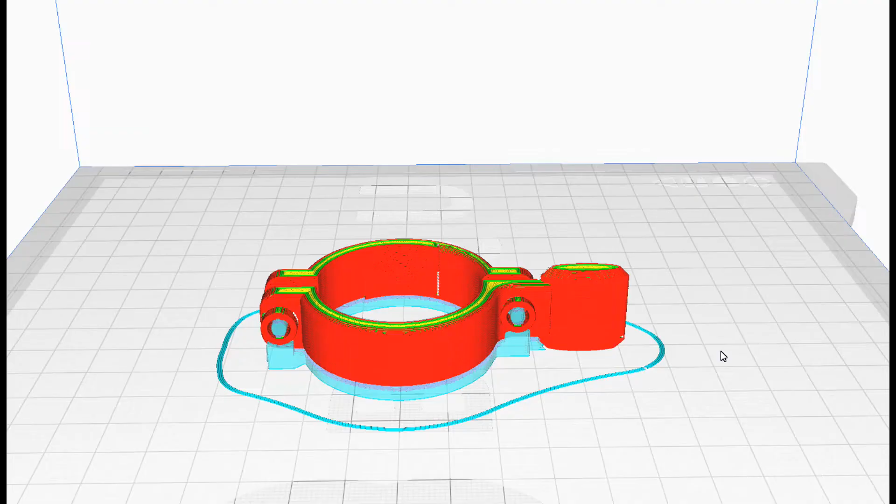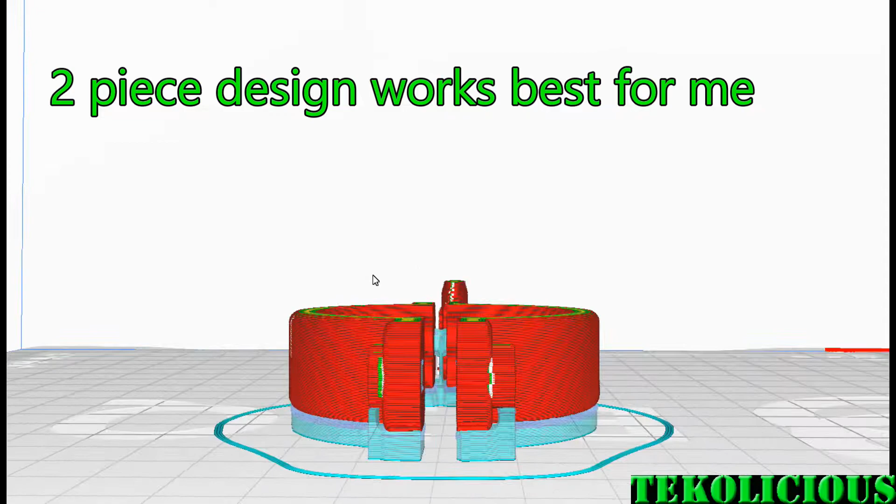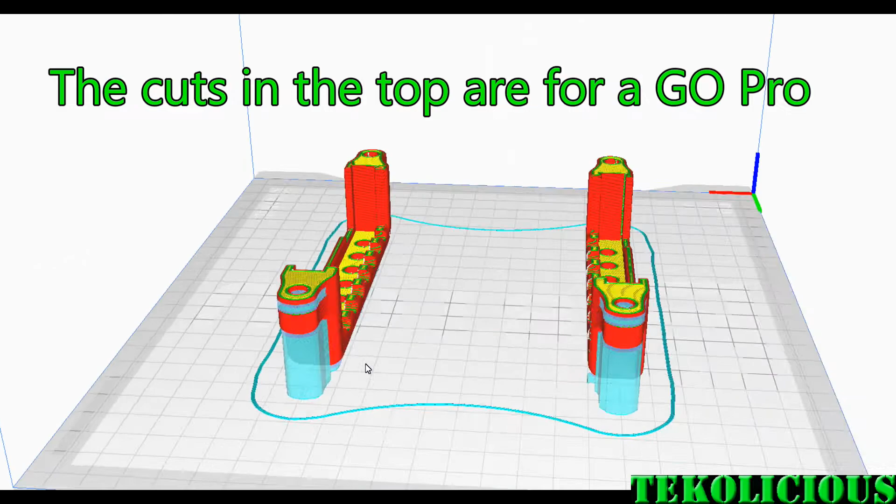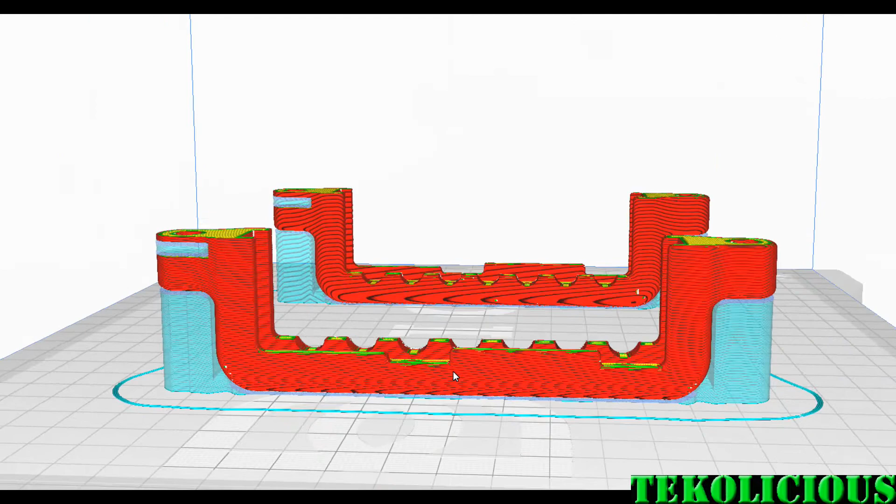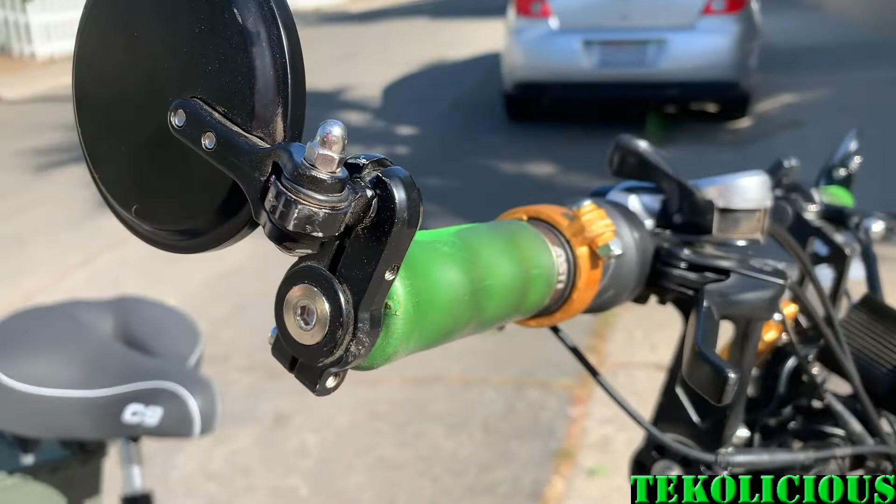So anyway guys, that's my video. Hopefully you guys really liked it, and you got some ideas on bumper designs or throttles. I really like printing stuff for e-bikes, I'm gonna come up with more designs. I'm already working on more stuff, but I really like the way this one came out with the two-piece design. It's easy to get over when you have the mirrors and big fat grips, and I really liked the bumper design because I can put my GoPro right on it and take videos right from this position.